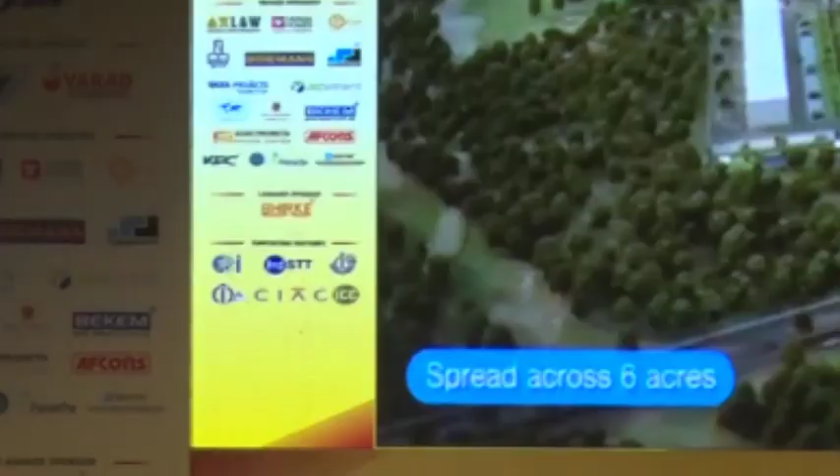Vision, trust, relationship, commitment, technology, values - all these qualities and attributes merged into one individual or corporate entity take that individual or company to an altogether different level. One such company is New Consolidated Construction Company Limited.

A professionally managed ISO 9001, ISO 14001 and OHSAS 18001 certified company, which has many eminent personalities on its board of directors.

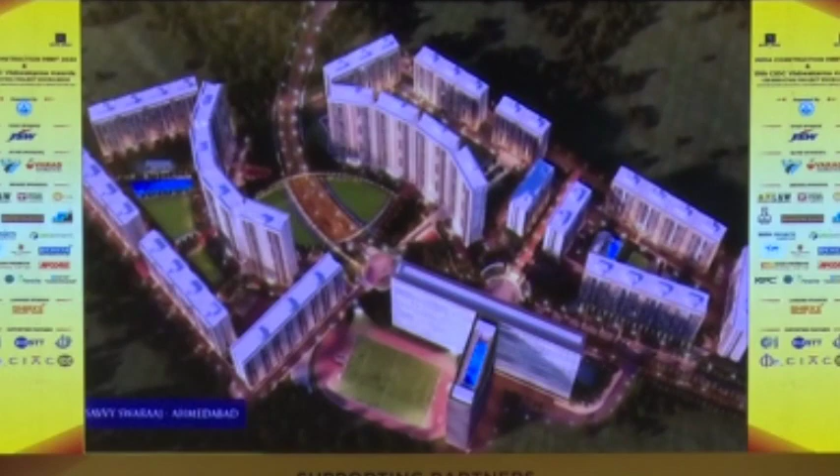Headquartered in Mumbai and having pan-India presence, New Consolidated Construction Company Limited is a flagship company of the Jasdanwala Group. Established in 1946 by the visionaries Mr. Yahya Bhai Jasdanwala and Abu Jasdanwala, NCCL has a current order book position of 38,000 million rupees, with around 25 major projects simultaneously progressing in Mumbai, Pune, Aurangabad, Hyderabad, Bangalore, Mysore, Chennai, Goa, Himachal Pradesh, Mangalore, Uttaranchal, Indore, Mohali, Chandigarh and Bhopal, besides other projects in the pipeline in various other regions of the country.

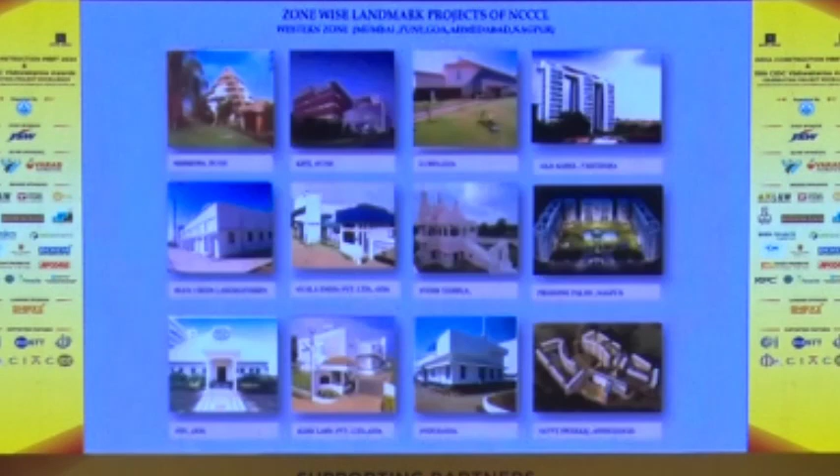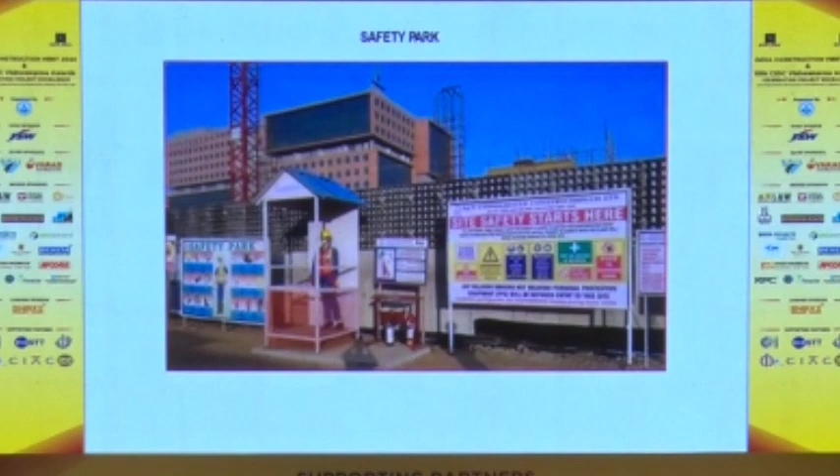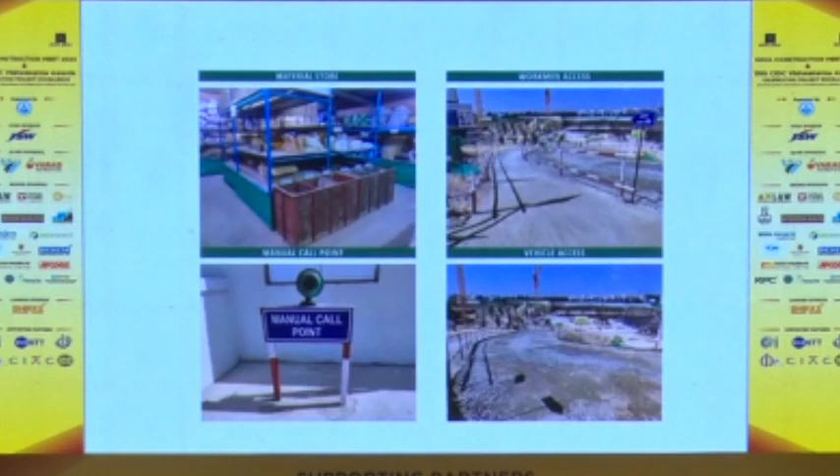The company has adopted modern methods of construction and adapted its working to suit the current trends and practices in the civil engineering field. It has trained its manpower at sites as well as in offices to complement its working, by sharing knowledge and technical expertise across geographic and industrial boundaries.

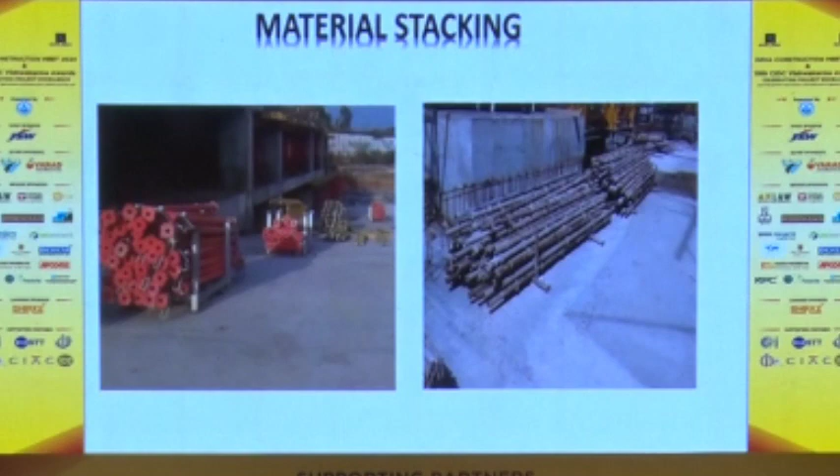The high standards of ethics, technological commitment, and quality as well as safety being the company's philosophy has won NCCL many accolades. A company that has provided construction quality with value-added engineering and a human approach to business that is the hallmark of Indian culture.

New Consolidated Construction Company Limited - creating a healthy environment, breathing life into concrete structures.

ITD Cementation India Limited is a leading construction company in India, operating over 8 decades with proven expertise and an excellent track record of delivering integrated services in design, engineering, procurement, and construction across multiple lines of business.

Together with the expertise of its parent company, Italian Thai Development Public Company Limited, Thailand, one of the largest civil engineering contractors in Southeast Asia, ITD Cementation has successfully maintained its position as a market leader. We are the only company with MNC parentage listed on the Indian Stock Exchange, which has been assiduously working towards building stronger infrastructure throughout the country.

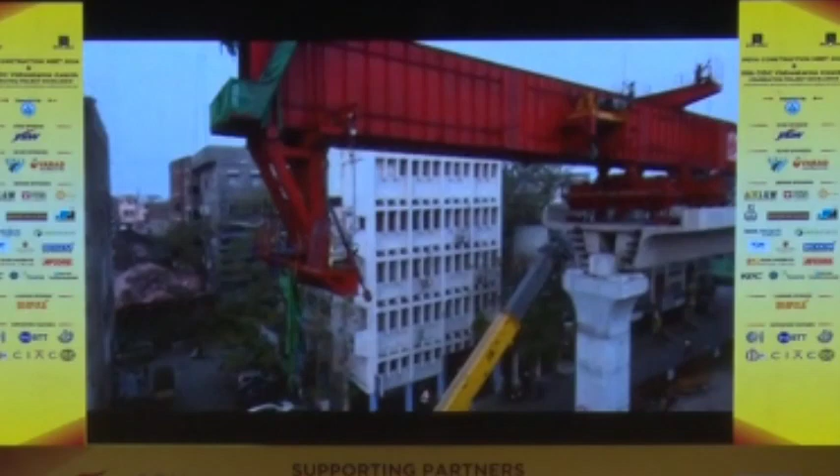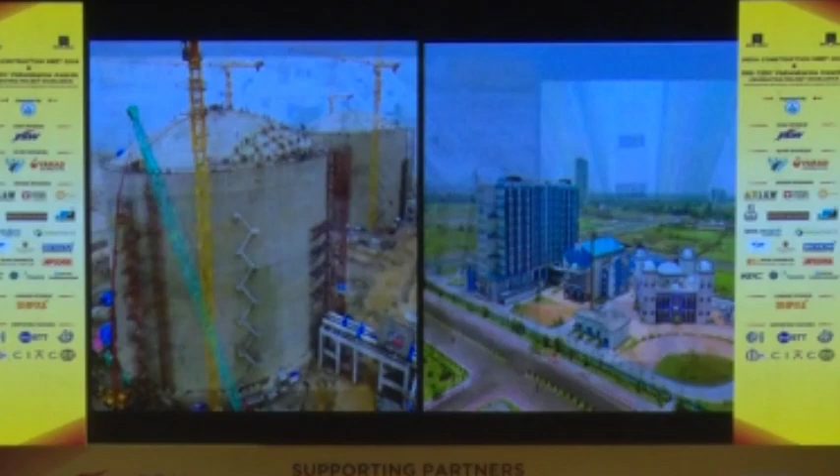Our company has developed a strong brand recall among clients including government authorities, port authorities, public sector undertakings, large private sector companies and state boards, amongst others. We have achieved excellent performance with high quality work and won several awards for excellence from many apex bodies. We are currently operating in 5 verticals with operational strengths spanning the major areas of infrastructure development, with a clear vision and leadership position in some of the key divisions of growth.

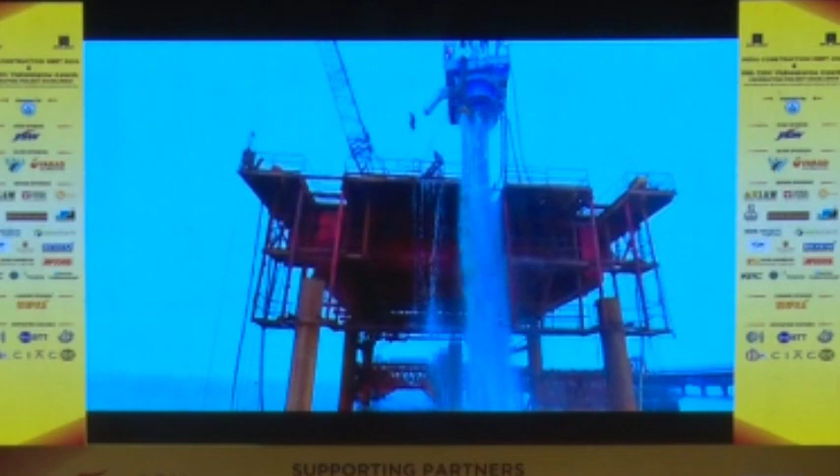Maritime structures: ITD Cementation is leading in the field of maritime structures, having built many iconic projects across the East and West Coast for prestigious clients like Port of Singapore Authority, Dubai Port World, Indian Navy and many major port trusts.

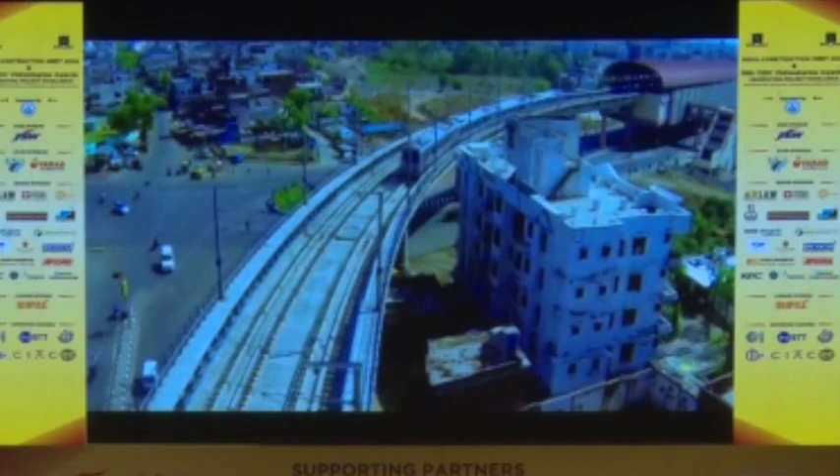MRTS, tunnels, airports and industrial buildings. We have established ourselves as a faithful partner in building a stronger India, and together with the strong ITD parentage and the high standards we set for ourselves, we have executed large complex projects like MRTS, tunnels, airports and industrial buildings. We are now uniquely positioned to execute on our own strength airports, underground tunneling, elevated viaducts.

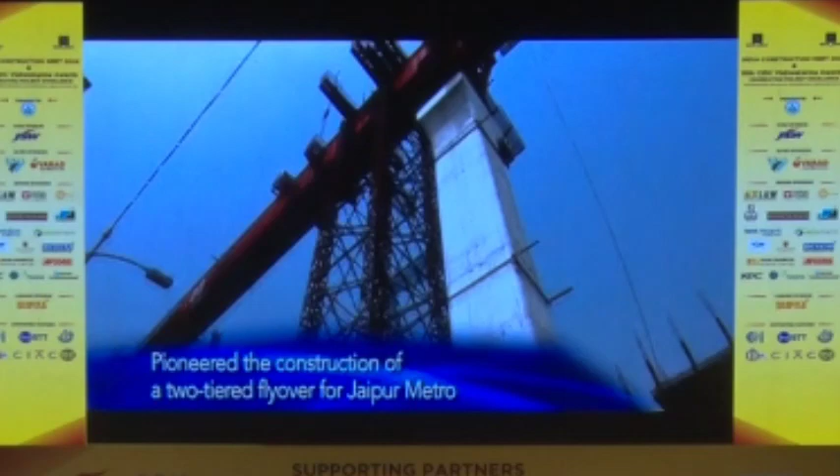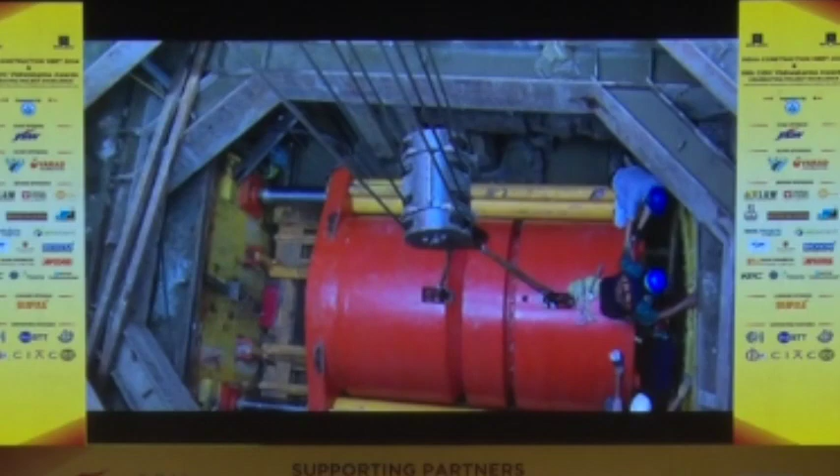Hydro, dams, irrigation, water and wastewater. We have contributed substantially and credibly in providing expertise in construction of earth fill, rock fill and concrete dams and tunnels, thus fulfilling India's ever-increasing need for hydroelectric power and irrigation systems, including water and wastewater, micro-tunneling projects under the multilateral programs through various state corporations.

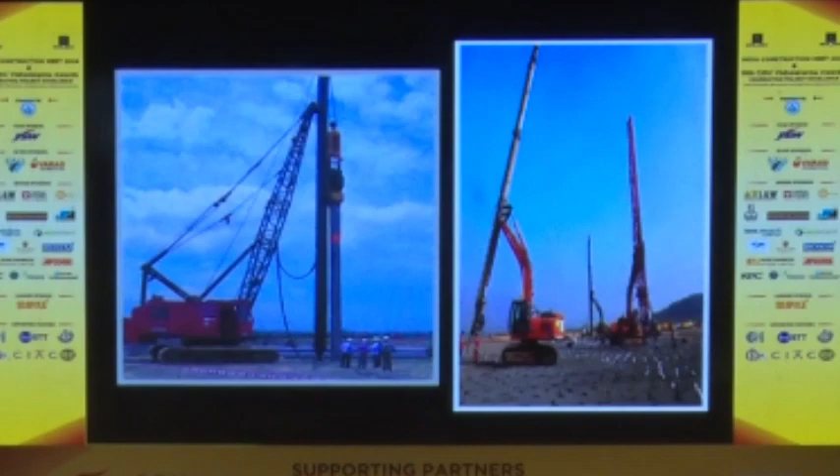Foundation and specialist engineering. ITD Cementation was founded on the growth of ground engineering expertise, and till date, it continues to lead the industry in the field of piling and secant piling, diaphragm walling, ground improvement, dam rehabilitation including box pushing, tube heading and micro piling.

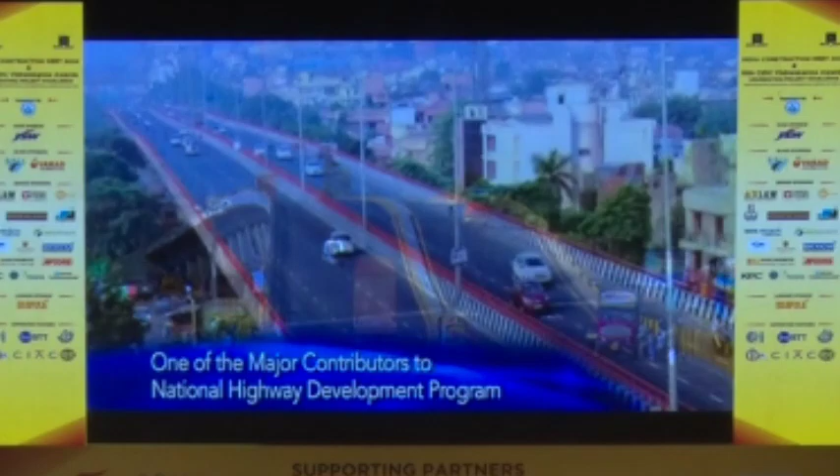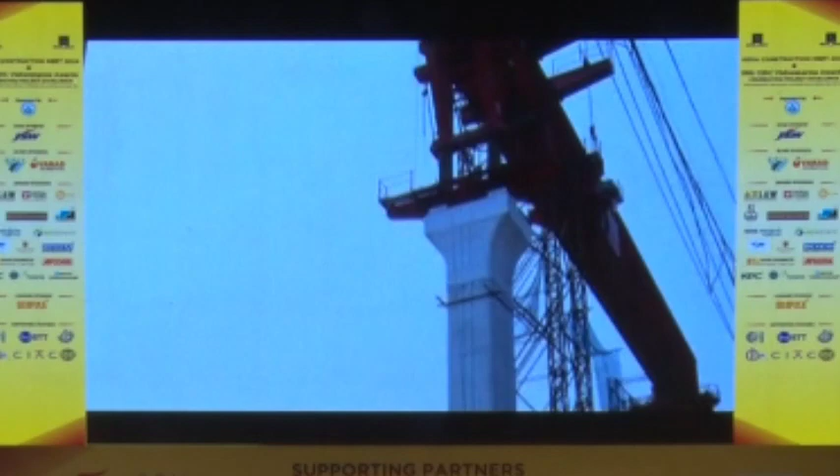Highways, bridges, flyovers. We have successfully implemented several road projects for the National Highway Development Program and have contributed over 400 kilometers of road network, along with construction of major river bridges and flyovers in cities with high traffic density, without affecting traffic flow and safety.

ITD Cementation implements its CSR mantra of giving back to society by providing good quality education and improving infrastructure by constructing and renovating schools, and hygiene programs for schools near our project sites under the Swachh Bharat mission.

ITD Cementation India Limited has implemented the world-class SAP ERP S/4HANA for its entire operations across India, along with ISO and OHSAS certification by DNVGL for high quality and safety standards.

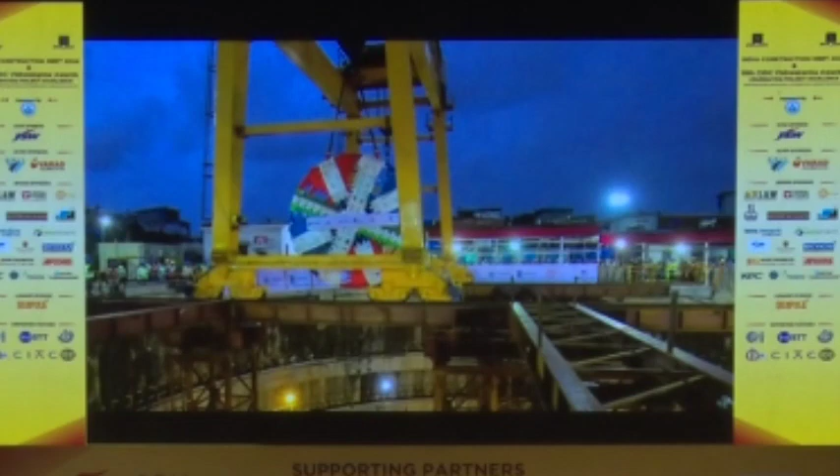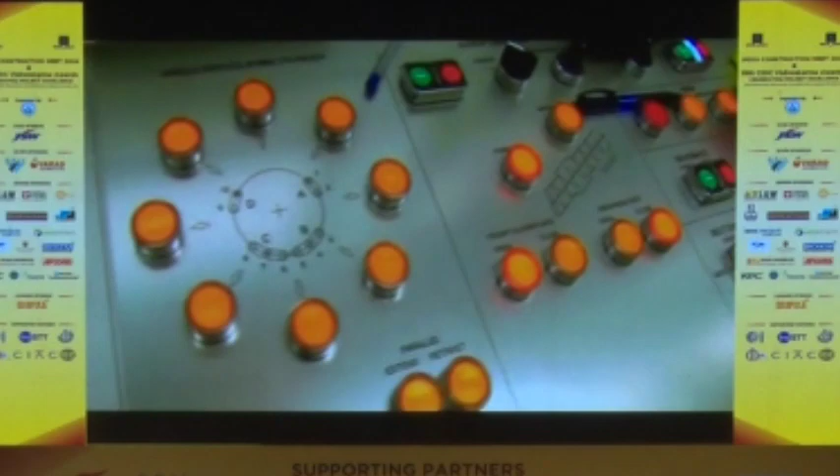The infrastructure development segment is in the midst of extreme positivity, and there's an overall optimism in the economic sentiment of the country, which boosts ITD Cementation's growth and aspirations, keeping in line with its ethos of commitment, reliability, and quality.